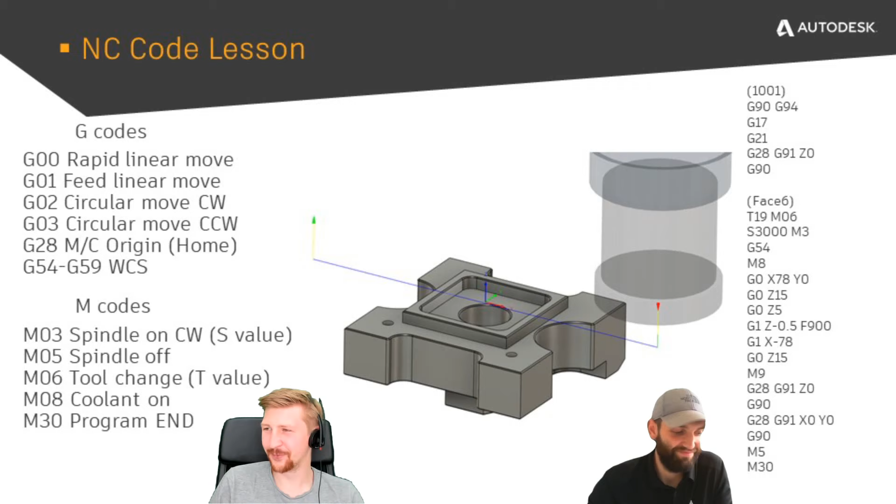So yeah, Spencer's laughing away now. No, I think whoever did that interview, it seems like a very wise man. Wasn't you? Just to clarify to everyone on the call, it wasn't Spencer.

Right, so what are post-processors? Post-processors take those toolpaths from Fusion and convert them into the correct language for your machine. So each type of machine and controller will have a post-processor dedicated for it. Imagine this as an interpreter. So effectively that toolpath can be posted out using the Grbl post-processor, as you see on the left, and then the Heidenhain post-processor, as you see on the right.

You can see the difference there, where we've got G01s and G0s, Heidenhain have L moves for linear moves. But you might notice a common one there, they've got M3, which is spindle on. So you see a couple of commonalities between them, but it can be very, very different. So that's the same toolpath posted out using two different post-processors. As you'd imagine, you can't run the Heidenhain on the Grbl, and you can't run the Grbl on the Heidenhain.

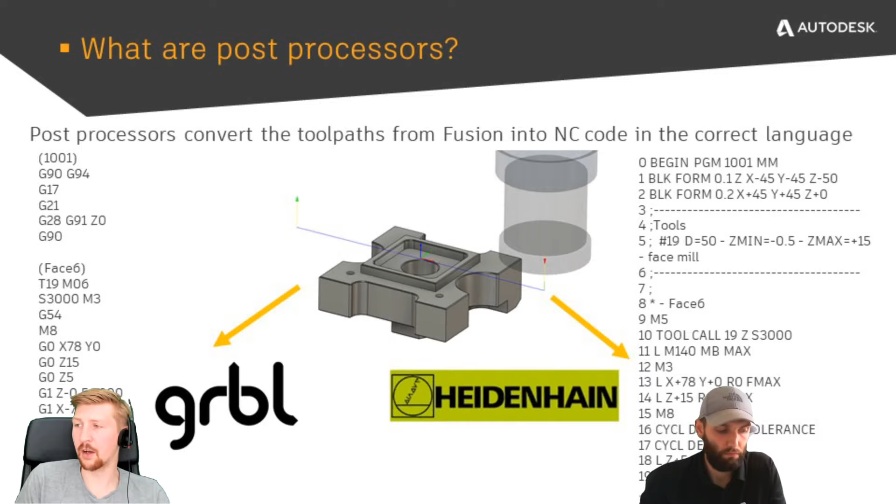So you've got to make sure you've got the right post-processor for your machine. Again, I probably simplified that far too much, but please shout if that wasn't clear.

Right, we keep talking about Grbl. What is Grbl? Now, I've taken this directly from their website, but basically, it is an open source piece of software that takes the G-code that you give it, and converts it into electrical signals that will move stepper motors, power relays, etc.

So you give Grbl X10. It then runs that through a microcontroller. Arduino is probably the most common one out there for doing this, but you can use Raspberry Pis, all sorts. It's going to take that G-code and convert it into the correct set of electrical signals to actually do that command. So again, for those of you that run industrial machine tools every day, we really take for granted how clever the controllers are in doing these sorts of things.

If any of you out there have made your own CNC machine or adapted one using an Arduino and Grbl, you'll know how intense it can be to get these things set up correctly. You've got to, for example, again, I'm going to bore everyone now. You think about a ball screw. So a ball screw is how we convert rotary motion into linear.

Spencer's laughing at me because he's thinking, Rich, get back on topic as quick as you can, mate.

So a ball screw takes rotational motion and converts it into linear motion. They have a pitch, much like a thread, a nut and bolt. So every revolution I do 1 millimeter. And then you've got a stepper motor normally that actually moves this round. Those are stepper motors on the right. You can have servo motors as well, but they're in the higher end of the scale and out of my reach for my machine. Then you need to know how many steps the motor does per revolution.

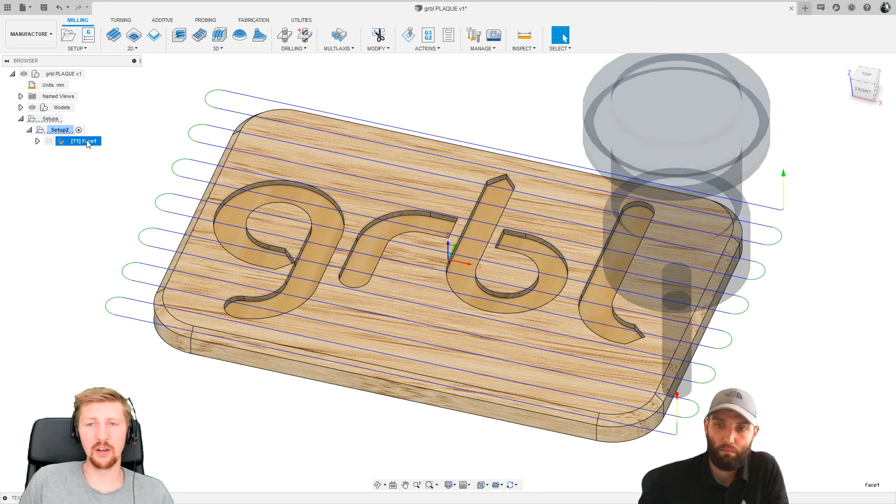So let's have a quick look in Fusion now, because it is a Fusion live stream. So what we've got here, we've got my lovely test block, and I want to post out this. So this is a really nice facing path. I could right click and go post process. I could click on here, go actions, post process, but I'm going to show you the new way of doing it, which is to create an NC program.

So this is very similar to posting, if any of you used Fusion before, but this is a bit of a nicer dialogue. I prefer it personally, and it shows you the operations you've got, and you can tick them on and off. Let's say you've got a machine without a tool changer like I have, and you've got like 7 or 8 toolpaths on a part. What you have to do then is split it up and run one bit, run another bit, and you can forget where you'd got to.

So let me just very quickly, again, I'm brilliant for not being well prepared. Let's just duplicate this a load of times. There we go. So now I'm going to right click on my setup, create an NC program, and I want to do the first one there. I should have deselected them all and selected one. God, that was bad of me. So I've got face 1 there selected.

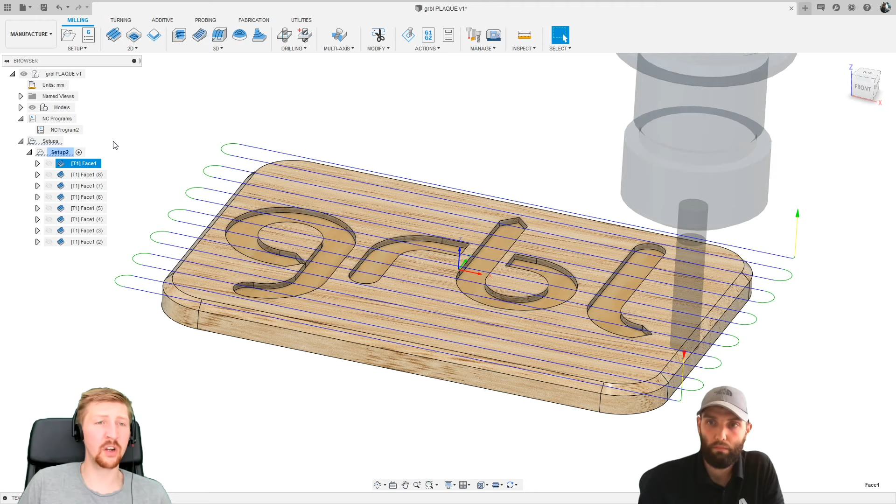I make that yesterday. I come back today and like, oh, how far did I get? If I'd just posted out face 1, I'd have had no idea how far I got to. But if I now edit my NC program, I can see, oh, I did my face 1 toolpath. Right then, I'm going to create a new NC program, and I'm going to do these 2 today. Okay. Tomorrow I'm going to come in, you get the point, and it just lets you see exactly which operations you posted, and it saves them for you there.

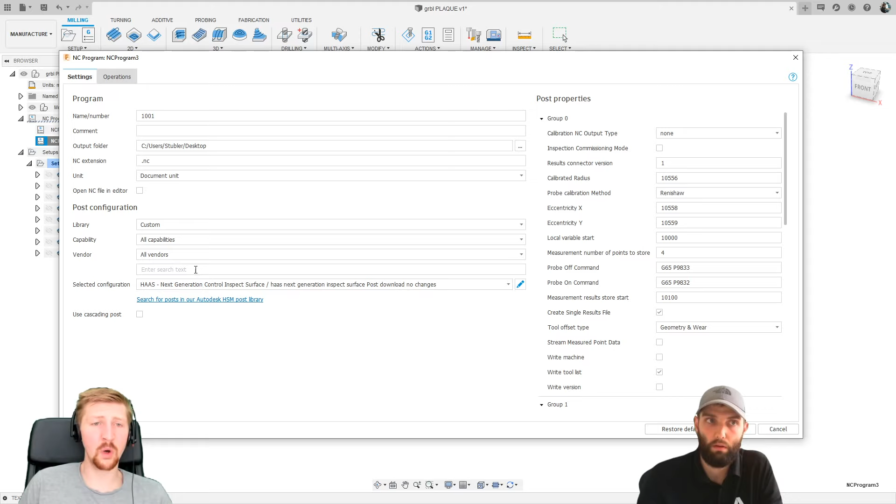So that's in the operations tab here. Gives you a nice bit of information. You can also reorder to minimize tool changes, so on and so forth. Right, settings. This is where all your post settings are. So I do a lot of post editing, so I have my own custom library, which, although it sounds posh, it's just a folder on the PC that you navigate to.

But let's just look at the system. So this is your installed post library. This is not a post editing class, so if you want that, that's not today. And I'm just going to go down for Gerbil or Garble, whatever we're going to call it at the moment. And what we've got here now is the ability to have some different options. So when you post out NC code, it outputs a tool list in the header. Do you want that? Do you not want that? You can tick that off.

Do you want sequence numbers? So back when we used to handwrite NC code, we used to line each number, N10, 20, 30, 40, 50. But now we've got CAM software. It's not as common, but if you want them, tick it and it comes on.

Right, safe retracts. Now this is a big one for me. My Denford Nova Mill is painfully slow. And also the origin is the opposite end of the machine to where I have my vice set up. So the problem is every time it ends the program, it spends what feels like an hour going up, going all the way back home, and then it has to come all the way back and all the way down. So all I do is I just set it to clearance height. So at the end of the program, it goes up to the clearance height and just stops there. It doesn't go back home. That might not be the right thing for you, but it saves me a lot of time on my machine.

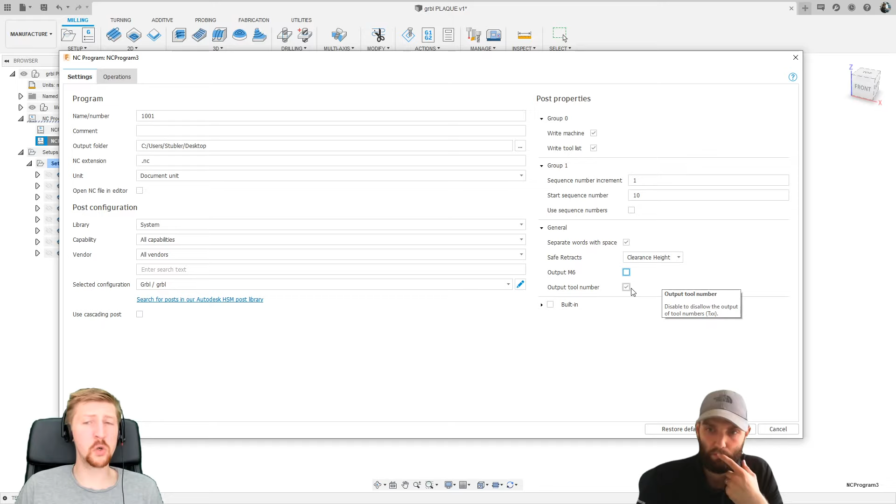Also, you might not want the tool number to be shown, because if you're not doing something called tool length compensation, if you put your tool in the spindle, then use that tool to set your Z height, you are most likely not using tool length compensation because you've set that tool to make your datum. If you use a reference tool and then take the length of it off, you probably know what you're doing and know you're using tool length compensation. But you might not want that tool number to be output as well. So there are a couple of properties.

The fact that we now turn that off by default has probably saved people a lot of time. Spencer spends a lot of time on the forums and he pretty much pushed a lot of these developments. So please give a round of applause to Spencer if you've been using these posts recently and found out how good they've suddenly got. This was all because of the feedback. That is the lovely thing about Fusion. We spend so much time reading all your feedback and trying to influence the product by this feedback. So please give us your feedback, good and bad. It really helps us sort out our priorities.

We do have a list in our minds that we want to aim towards, but that is ultimately defined by the customers. If the customers all shout they want one thing, it's going to get a lot more priority than another. So a bit of background in why a lot of this work's been done is because people are asking for it. What I'm going to do now is show you some sneak preview stuff.

So the problem we've got is the system folder here is like your install folder for the software. So that only gets updated every time we send out a major update for Fusion. Some people say we do it too much already, but the problem is if we develop our post and we update it on, let's say, the 2nd of the month, but the update went out on the 1st of the month, you've then got 30 days to not get the update. So what we've got is our HSM library.

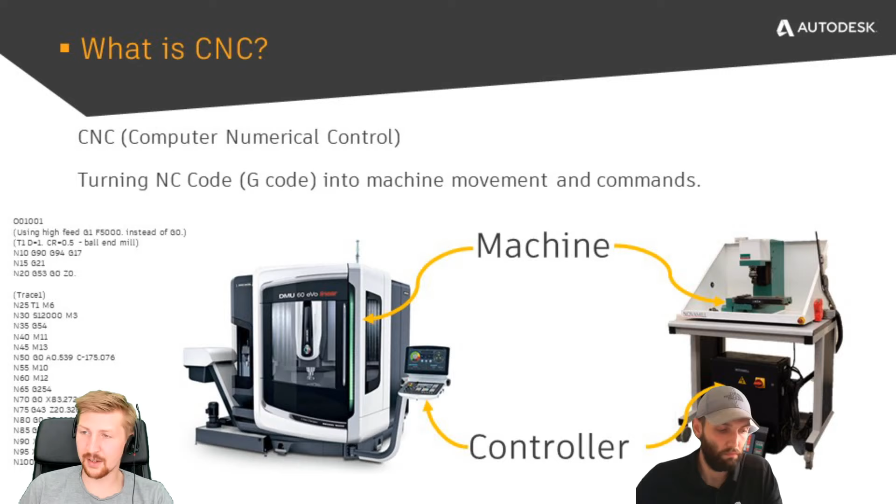Yeah, brilliant. Another question from Carl. How would you go about restarting if you're halfway through NC code? Maybe power failure to the machine or tool breakage? Okay, so that's really difficult. You need to know where you stopped.

So this has happened to me a lot. Tool breaks, stopped on there. What I tend to do is have a look at the NC code, have a look at the lines where I stopped, and then basically look in the code, do like a find to find those X and Y positions, wipe out everything above it, and then I hand edit like a lead-in move to go down into that

and then carry on again. So what I might do is, if I see that it's on line 2320, I might go back to line 2310 and then lead in at that point. So it leads into where it's already cut and then carries on.

But unfortunately, if you don't know where it stopped, you're going to have a very difficult time in working out what to do. What you could potentially do is literally look at your part, look at how far you cut it, and then in Fusion put like a boundary or something in to actually repost out like a recovery NC program.

So let's say you're doing like a 2D adaptive roughing, and you're doing a pocket that's 10 mil deep and you're doing it in 3 mil steps. You should be able to maybe get a caliper out and measure and go, oh, I got down 7 or 8 millimeters. And then you can just limit the height in Fusion to repost out a recovery NC code. So there's a couple of different ways of doing it, but you are pretty stuck.

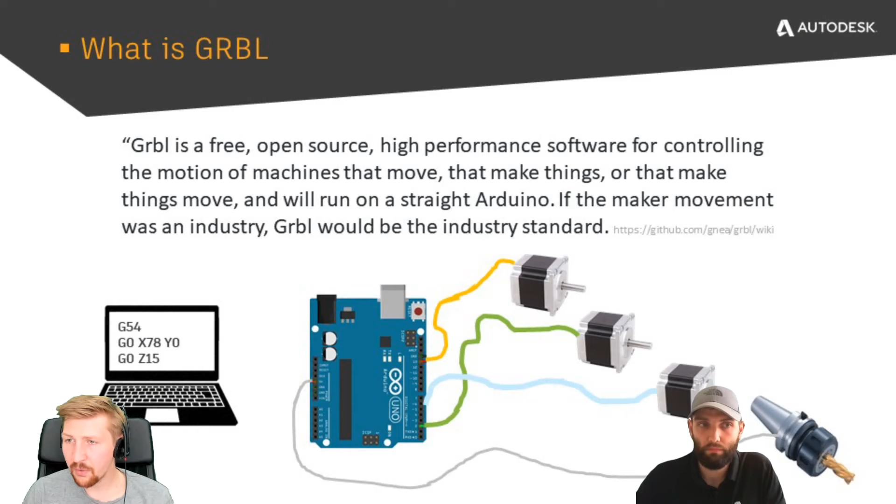If you wanted a different offset, G55 for example, in the manual command or the MDI, you'd put in G55, hit send, and that would put you into the G55 coordinate system. Then you'd move the machine to where you wanted it and hit 0, 0, 0, or just one if you just wanted to zero the X. There is also a table where you can type these values in by hand, but unless you know what you're doing, don't faff around with that.

Just move the machine to the zero, make sure you're in the right coordinate system, and then hit those little zeros on the right hand side of the X, Y, and Z tabs. But yeah, I'm not going to get too much into the individual G-code senders. There's loads of amazing tutorials. You just got to pick the one that you think is going to work best for you.

Yeah, so just to reiterate, you would use your G-code sender to set the zeros for the work coordinate systems on the machine, and then in the software, you define that in the setups, right, Rich? Yes, that's correct. Perfect.